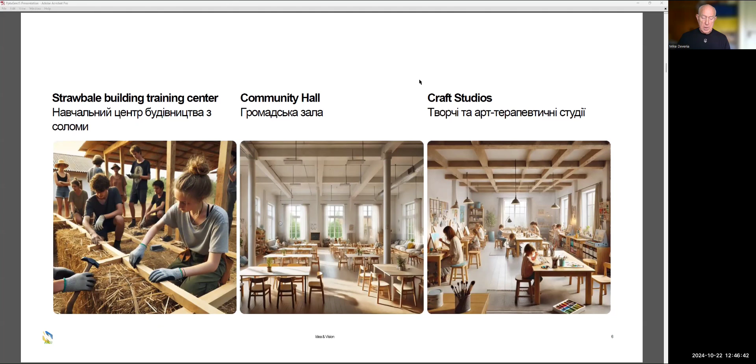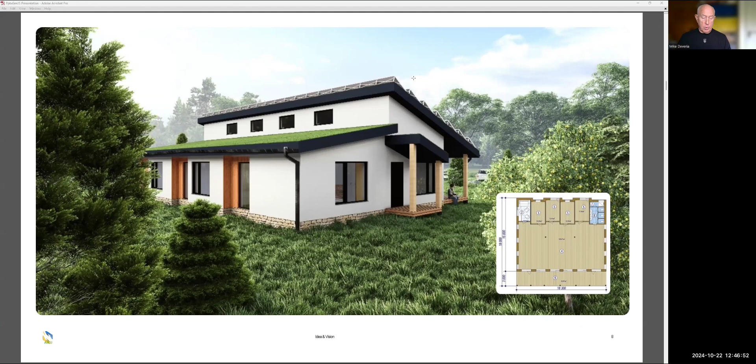The ABCU team has therefore put together a prototype proposal and has designed in some detail a community centre whose concept is versatile enough to comprise classrooms, craft workshops, quiet rooms, a library, physiotherapy rooms, and more, but will have as its centre a main communal hall for uses such as a dining room, dance floor, cinema, and so on, for up to 150 people, such as children and their mothers, families, veterans, and patients.

In addition to this community centre, we also plan to build at least 2 accommodation blocks, each capable of housing 5 families, with their own bedrooms, bathrooms, and a kitchen. We believe that these additional residences will allow the centres to host veterans, mothers and children, and complete families throughout the year, providing warm, comfortable accommodation and a centre for education and relaxation during the colder months.

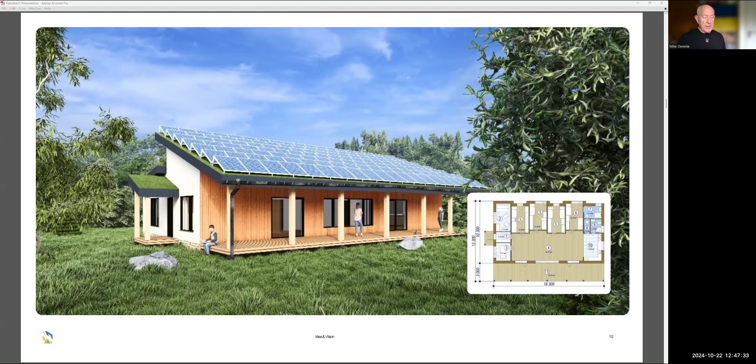Together, these buildings will create a sort of community village where the residents and visitors will find all their needs are met. But it's not our idea to come to Ukraine to build this centre. Rather, it is our intention to give modified STEP workshop training to the people living in the communities to teach them the theory and the practice of straw bale building, which will result in the construction of the community village.

Empowering people to build the community village will serve as a catalyst for job creation. They will be able to build affordable homes after taking their courses. This will contribute to local economic development and community empowerment, which will play a significant role in alleviating poverty and improving the quality of life.

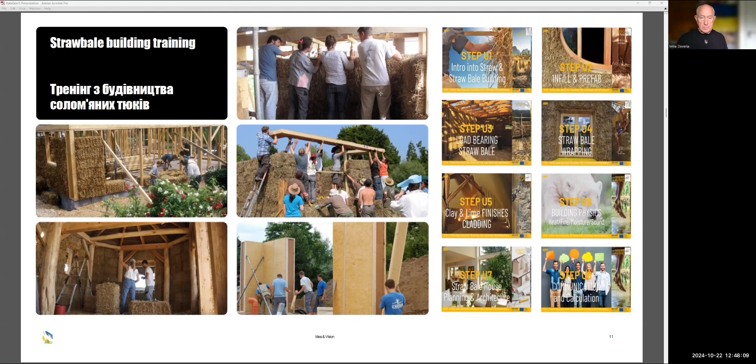It's very important that what we build in terms of circular construction in Ukraine corresponds with developments in the rest of Europe. So the buildings have been designed to maximize their sustainable credentials based on EU straw bale building standards. The choice of foundation will depend on the ground conditions we find, and there are many natural foundation solutions available.

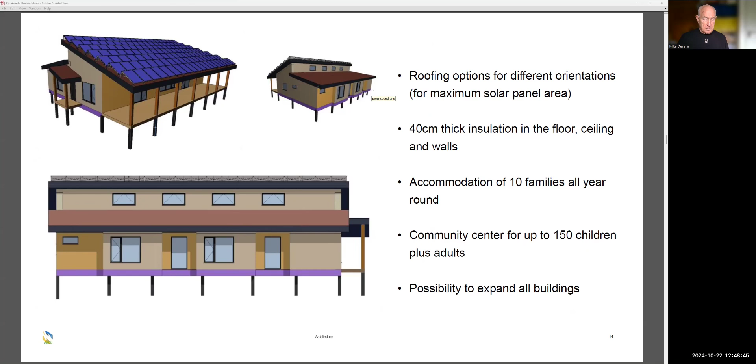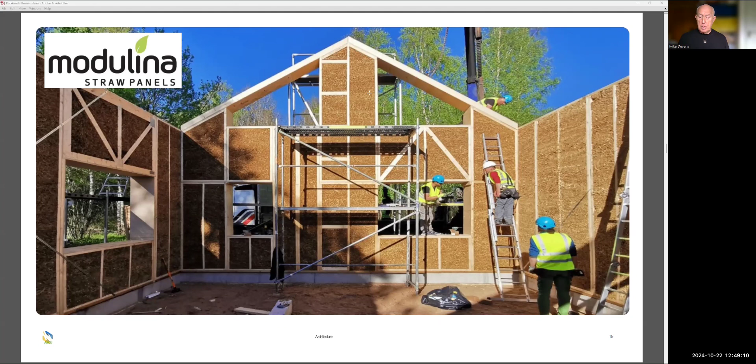Doors and windows will be manufactured and purchased locally. The windows will be triple glazed to reduce heat loss and optimize comfort. All doors will be wheelchair accessible and the sizes will be in line with local fire safety codes. Openings to the cold north will be minimized, while large glass facades to the south and west faces will optimize the benefits of the thermal mass inside.

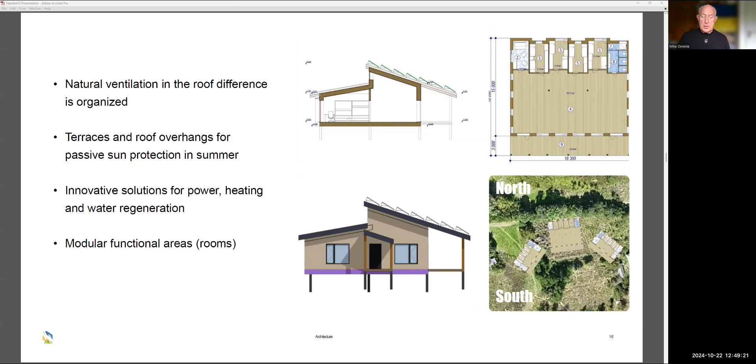Flat sloping roofs will be covered in sedum with photovoltaics and solar boilers, and all buildings will enjoy 40-centimetre thick straw bale insulated floors, ceilings and walls with natural ventilation incorporated into the design. Internal partition walls will have wooden frames filled with natural material.

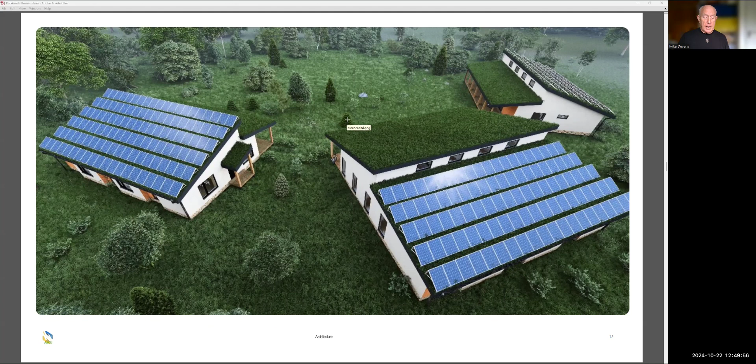The internal walls will be plastered with fine clay plaster, while the external facades will be either lime plastered or timber cladded at each client's request. Each building will also have a wide terrace at the front, protected by a large overhanging roof. So why straw bales? Well, straw bales are excellent insulators, cutting energy costs, and they provide the building with wonderful acoustic properties.

They are fire resistant and can withstand strong winds and earthquakes. Straw bale buildings are relatively easy to build and plaster and can be easily extended after building. They are very durable and can last for centuries.

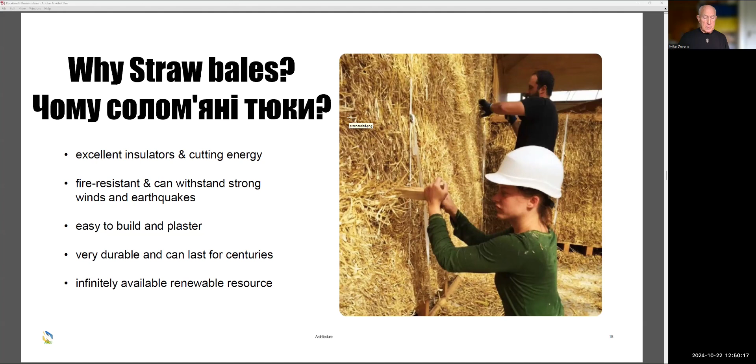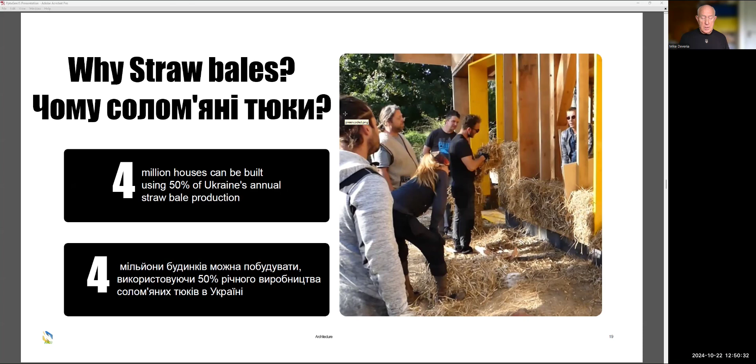Straw is an infinitely available renewable resource, especially in Ukraine, where in 2021 this country produced 86 million tons of grain. That's over 80 million tons of straw. Using only half of what is available, at 10 tons per house, the country could, theoretically, build 4 million straw bale houses per year.

Some of the innovative ideas that we plan to utilize are rainwater harvesting to reduce the dependency on main supply, solar boilers to heat water, photovoltaic panels with domestic batteries to store power, sedum green roofs for insulation and environmental aesthetics, eco-drains to recover heat from showers and kitchen appliances, grey-water filtration to reduce the dependence on septic tanks. Altogether, these innovative technologies will make the community centres substantially off-grid, thereby insulated from local power outages.

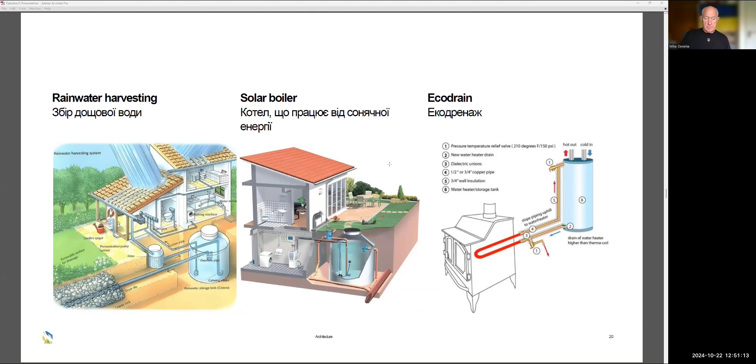So what impact will all this sustainable building have on their relation to the 17 UN Sustainable Development Goals? We believe that we will meet 16 of the goals. A detailed description of how we intend to achieve this has been presented in a separate document. We also have key performance indicators that we believe are possible to achieve, covering all elements of the 16 Sustainable Development Goals.

So who is our team? Well, I'm from Scotland. I'm a board member of ESBA and the chairman of ABCU. I will be the overall project coordinator and client liaison. Alexei Brzezinski from Ukraine is an architect with 17 years straw bale experience and will be heading the architectural design and landscaping online. Andrei Peron from Ukraine is a building contractor with 22 years experience and will be materials coordinator and project site manager. Victor Schul from Austria is a double master student in Vienna and Shanghai and will be our on-site building design and sustainable development instructor.